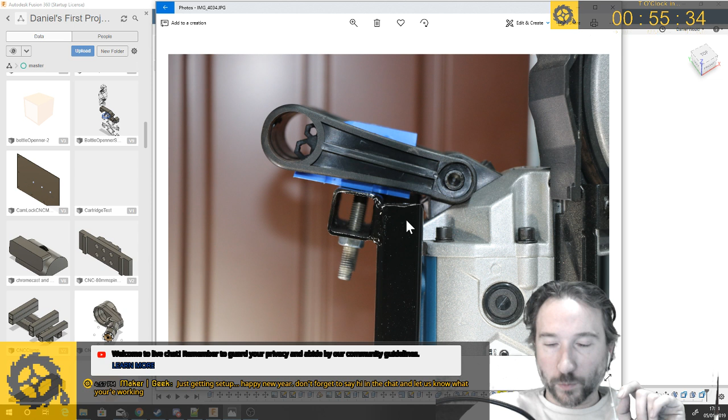This is sort of you can kind of see the handle just coming up there. Yeah, come back. There we are. So yeah, I kind of ended up with this being a little bit closer together and more directly under this, which I think worked nicely. Let's come back out of this.

So yeah, I took a bunch of beauty shots of this, but the main difference from what I had been thinking was I realized I don't really need or want a full-time welded-on foot for this stand, because the whole point is that it's easy to put the bandsaw on and also easy to take it off again. And if I take it off, I'm going to have to put this whole stand somewhere.

So I ended up realizing, well, I've got this vise. As long as I can clamp it securely in the vise, the flatter I can keep this whole mount, the better, because then I can just slot it somewhere out of the way. That was kind of the key revelation I had whilst I was cutting the steel originally this morning.

So that's what I ended up doing. This is it from the back when it's mounted. These two verticals ended up coming nice and tight into this side of the body. The switch is accessible here, and the handle just holds over on that puck, and it works. I'm not going to say perfectly, but it works well.

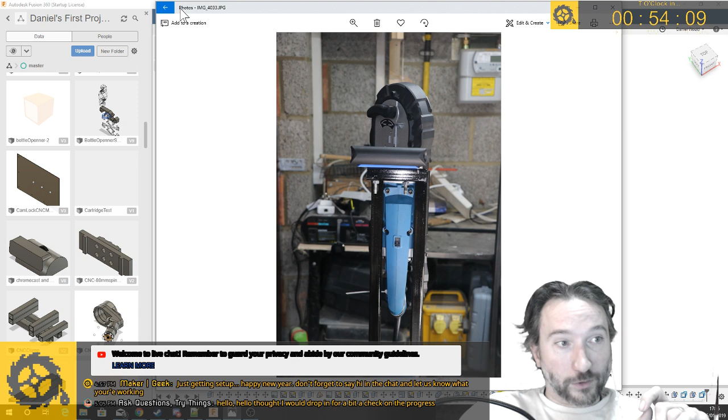Yeah, so I'd say progress today was good. I put the design of the 3D printed puck that I've worked on over the last couple of weeks into practice and put this whole mount in place. So this is kind of what it all looks like in situ.

There are a bunch of improvements I want to make to this, which I will certainly do separate videos on. There might be some cause to design something. I'm not super happy about zip tying the switch. It would be nicer if there was something built onto the stand that would reach across and clamp this in place, and I don't know whether I want to make that out of metal or 3D printing.

I might consider trying to make something that clamps onto the stand that reaches across. That would be quite cool. Ultimately I will probably make a larger work plate to clamp onto this metal piece right here. It slides back and forwards. There are a couple of screws that just go into a little track that you can clamp on, so I'd probably replace that.

And obviously the whole need to zip tie this means you end up with a plug-it-in-or-don't situation, and that's not ideal. So I will also probably, well, I have the beginnings of a plan to make it so that I have a sort of regular switch that it would plug into, which would let me switch it on and off nicely.

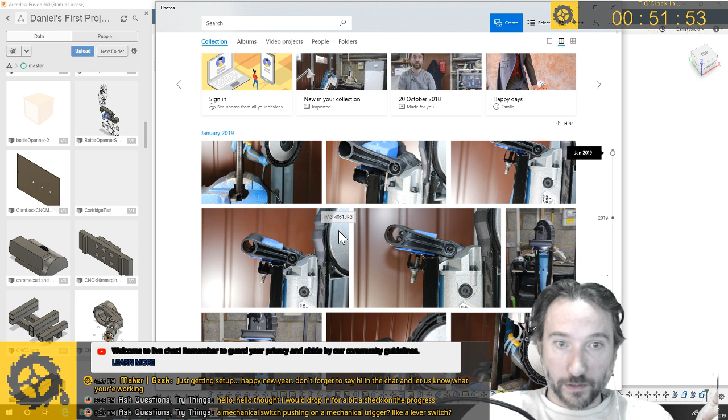It hasn't finished uploading some of that video. Maybe it has. There we are. So, although that's not working very well. We're going to get video. Let's just leave that for a second.

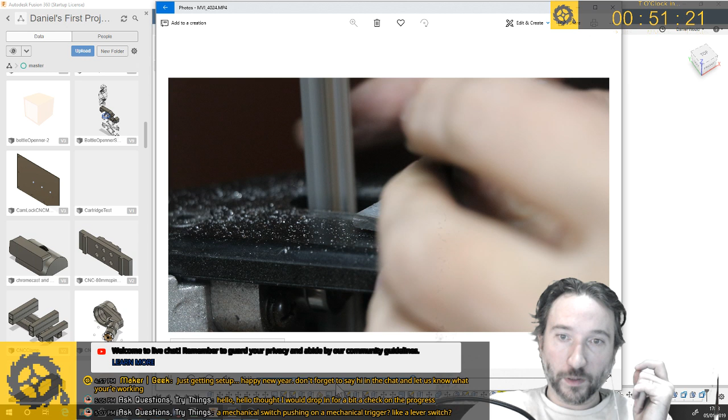But as you can see, it's really easy to use. I think the benefit of having a mount like this is quite cool — you can get a lot more control and precision. I didn't end up chopping anything completely through when I was doing it this way, just because I didn't want things to fall down through the fairly large gap here. I think a lot of people end up with a more zero-clearance pad when they're doing this kind of tight work, but there you go.

There will be a proper video of the making of that whole stand tied together, but for the people who joined to CAD like nobody's watching, you saw it first in terms of the initial thinking, design, etc. So I am going to put this to the side for now. I do have some ideas for switches and such, but I don't want to do that right this minute.

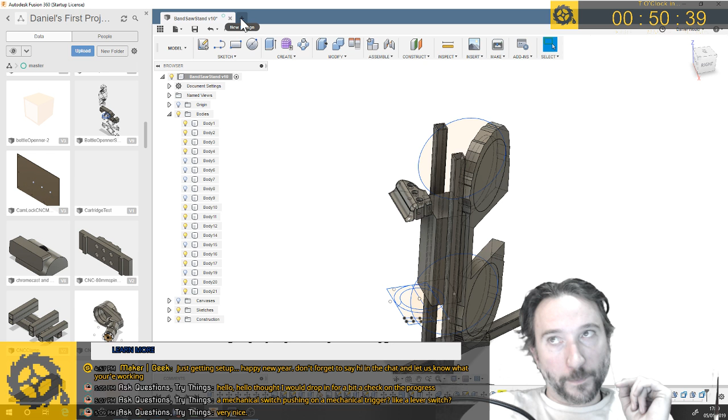I have a couple of things I want to work on. One is fairly boring, but in the scope of workshop tidying, I do have this idea. I've seen other people do 3D printed soft jaws for their vise, and working with the vise today made me think it would be kind of cool to do that. So I took some measurements earlier.

I might whip up a basic design for that quickly. I do want to finish this - the coffee carrier V2. I haven't finished the coffee carrier design. I did do a bit more work on it last week, and then I got frustrated with parts of it.

But we can continue that, and then the thing I want to get into at the end - it's been on the list for a long time - is to make a gate for the side of the house. Currently we have a little passage that runs down the side of the house that people can just come in and out of, no problem. It's been on the theory for a long time to just put maybe a little gate there, so I'd like to play with some design ideas for that.

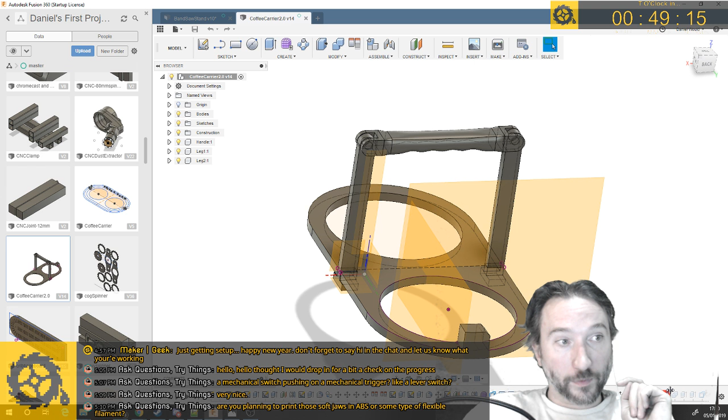So that is what's on my plan. Am I going to print the soft jaws in ABS or some sort of flexible filament? I might print them in PETG because I do have some PETG. That would probably be better than PLA, but I might try both. They're not very big, so the main thing I think will be to put some recesses in for magnets - that seems to be the cunning plan that people do.

So where to start? In fact, I'm going to do the soft jaws first, because I think it's going to be easy, and I realize saying that is like famous last words. I'm going to be here in like half an hour kicking myself for this stupid thing.

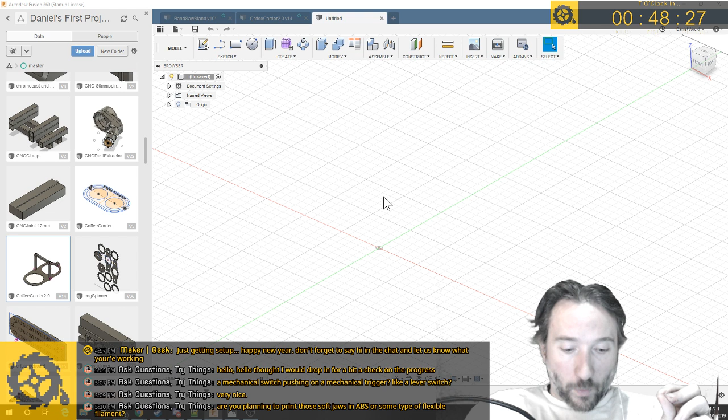Right, layout grid. So what do we need to do? So they're 107 mil wide. What I will quickly do is I'll just model up what is an actual jaw. So they are 25 mil tall and 13 wide, like this, and they are 107 mil long. Each jaw has a metal plate on it, which is screwed on.

So I just want to make a cover, basically something that will fit over that fairly snugly with space for some magnets to just hold them in place. There's no real forces at play - it's just going to be squished by the vice force. I guess I will want to think when I 3D print them about how much infill. Normally I print things very, very empty, but if the whole point is that it's going to be crushed in a vice, probably want to make them a little bit more robust.

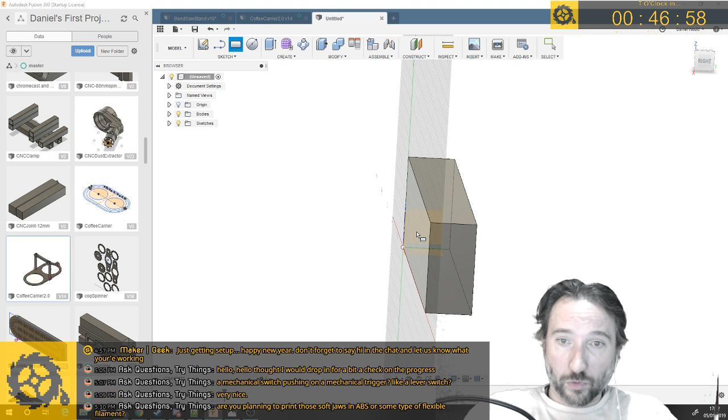So what is the best way to create essentially just something that will cap over this? Doesn't need to go full 13 wide. I'm going to draw on this plane, coming over a wee smidge in basically all directions. 27 by 100 - if I do 27, that's 2 mil higher than the thing, that sounds fine. 112 - what was 107, so how much do I want on each side? Probably only needs to be 111, because then we've got 2 mil clearance all the way around. I just need to dimension that off that line to make that what I want.

Marvelous. So what we'll do then is extrude that out, stick with our 2 mil dimension as a new body. Then let's turn that body off for a second, turn that sketch back on, and extrude the other way. In fact, I want to turn that body off, that body on, and we'll go back by 10 mil and join. And there we have a wee cover.

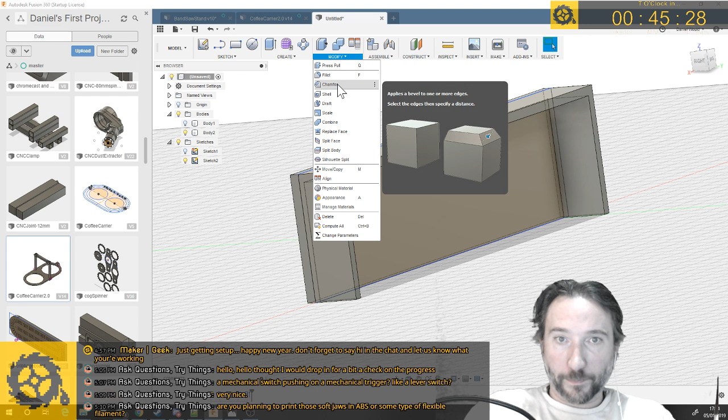That'll be perfect. Now, I don't think I need this to be squared all the way down. Let's just - not fillet, chamfer is what I want. So something like that. Maybe I'll do 2 distances and make that a little bit sharper - it doesn't need all that back material. It's obviously just going to be printed probably like that.

That'll do. I just want a couple of recesses for some magnets in the top. So let's draw in here, get to the center line. How big are my magnets? Oh yeah, I'll probably round the corners - that's a good idea because I just don't want to be touching things.

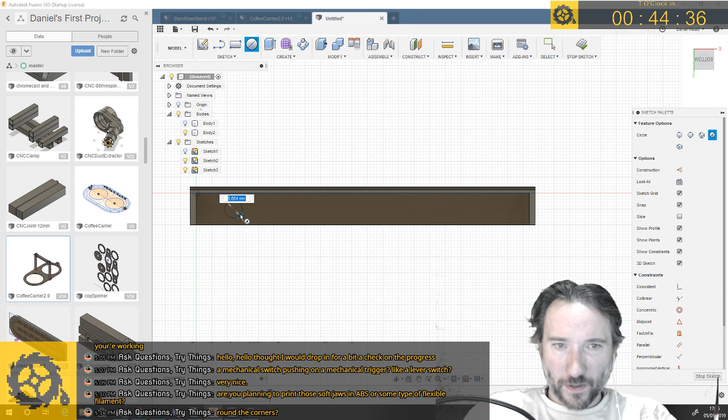How big were my magnets? I think I want to say 5, but let's assume 5 for now. Let's make them 15 in from the end - that's probably fine, isn't it? And let's create a rectangular pattern of them.

Somewhat evenly spread out, that looks good enough to me. Now I see the one thing I might find is that I'm planning on 2 mil thickness here, but that's not really going to be enough for the magnets, is it? That is not enough for the magnets. They're going to be at least...

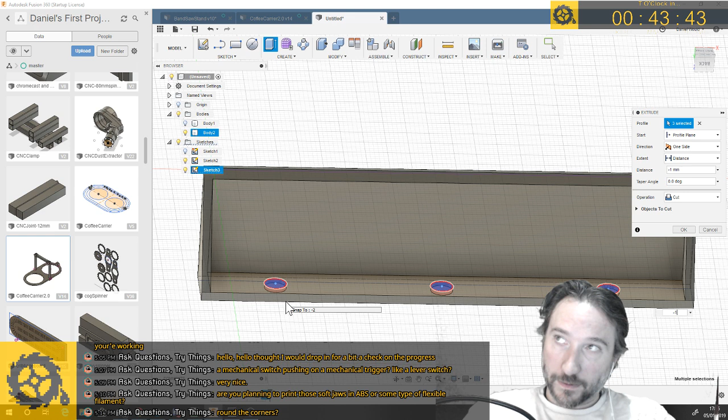I should have brought them up. I think I'm probably going to want to offset that face up, maybe another 2, top surface of a full 4 mil. That's a bit bulky, but that will give me a bit more space. I'm going to move that operation.

Come on, I want to move this operation. Oh, because I've got something active, that's why. We'll just reorder that and then edit that feature so that I can come down without causing myself problems. We'll come down more like 3 - it's at least 3. But there we are, that'll probably be that.

And then, as you say, let's round the corners. And I think - actually, before I round the corners, what we'll do is we'll put a little V slot in this front face in the center. I think that's probably going to be helpful.

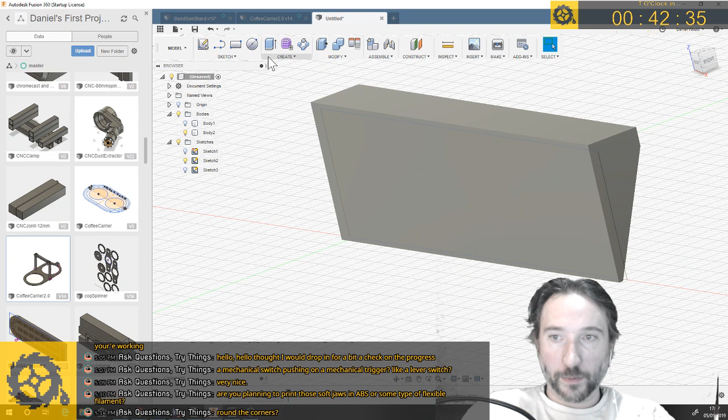Now I'm thinking about it, I might want to make this a bit more than 2 mil on this surface as well, because I want to dig in. So let's make it 4 mil on the front and the top, 2 mil on the sides, since they only need to latch over.

That gives us space to put a crimp in the middle. Let's see, where's my center point? There's my center point. We'll make a construction line, I think. And now what I want to do is, what's the easiest way to do this?

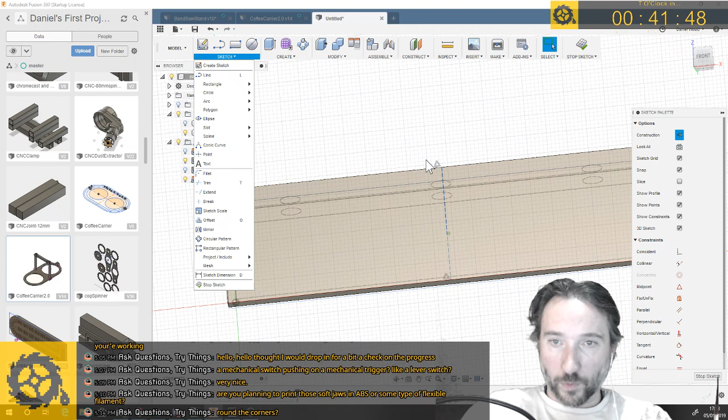How big of a V groove do I want? It only needs to be teeny tiny, a few mil. I don't know what the best way to do that's going to be. I could draw offset lines at either side. No, I think I probably want to do something on the end and then just extrude it across the length.

No, not in that sketch plane. Come on, stop messing around. This sketch plane right here.

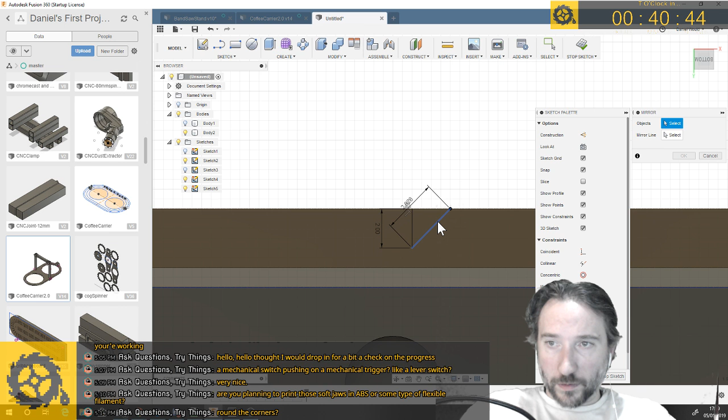Similarly, I have the center line come down about halfway. In fact, let's definitely come down halfway, and 45 degrees - just because it's better to do things that way. Also mirror pattern, please. Let's mirror over that center line, comme ça, and then we'll just extrude that groove all the way through.

Come on, there we are. Right, I think that'll do, right? That looks like a... what do we want? Various soft jaws. A couple of those printed in something like PETG, that'll probably do it.

So I won't print them right now because I do want to double check my magnets, but that's basically just going to be dob of glue in the bottom, stick the magnets in, bish bash bosh.

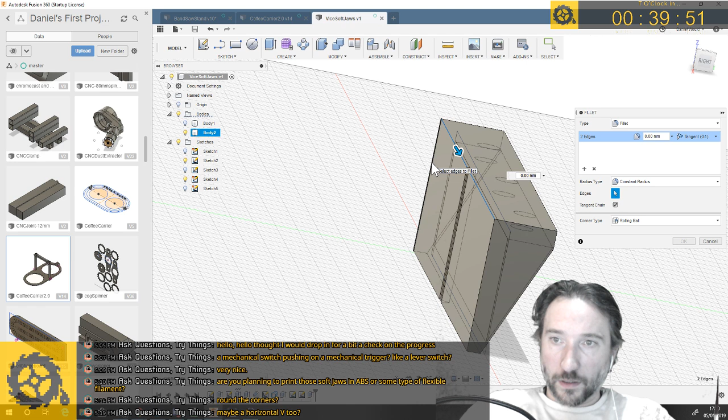So yes, chamfer the sides - I'll fillet the sides even. Let's take what, a 1 mil? Ooh, it's 1 mil too much. It's probably fine.

Definitely want that on all of those faces which are going to touch anything. And I guess we might as well do it on these faces which are on top. Yeah, that's probably fine. Maybe a horizontal V as well - that's a good idea, that is a good idea.

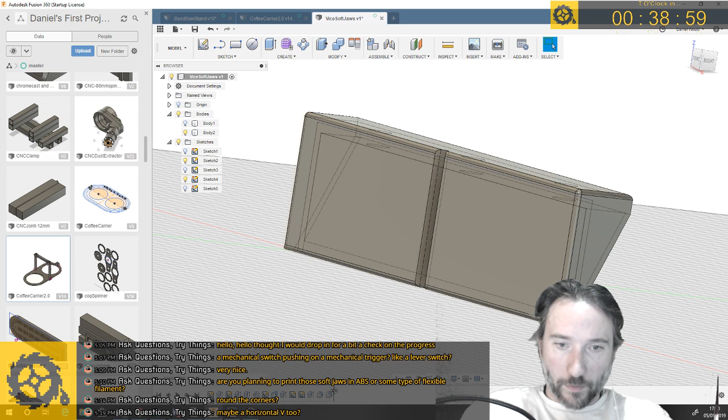Let me do that before I radius anything, because that just makes life easier. Let's come along here, middle line. We'll do the same thing, come back by 2. Then we'll draw another line.

Come up 45 degrees. Except you're off at a weird angle - what's the right angle, what do I want here? It shouldn't be so difficult. Hang on a second, if that's 45 and that's 90, I want 135. That's what I want, I don't know why that took me so long.

Come on, don't mess with me around. I don't know, it's snapped to 140 like nobody's business. There we are. And we'll mirror over that, like that. And we'll do the same thing that way.

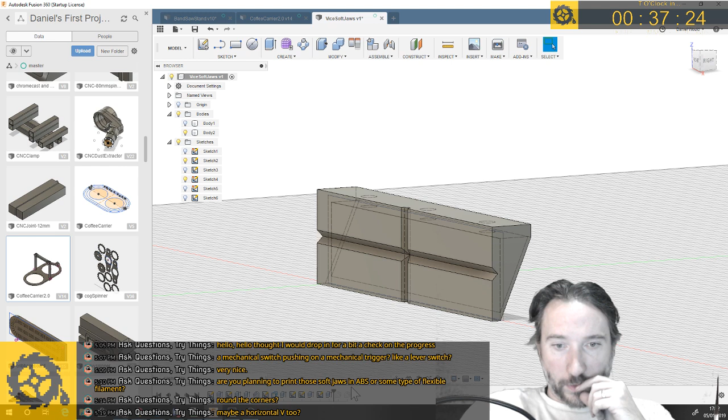Yes, that all seems very sensible. It's coped with. Now, should I chamfer or put gentle fillets on those internal lines now, or is that going to be all right? That's probably all right, I probably want those somewhat crisp. Again, I still think I'm probably going to print in this orientation, so those 45-degree angles should be fine with no supports.

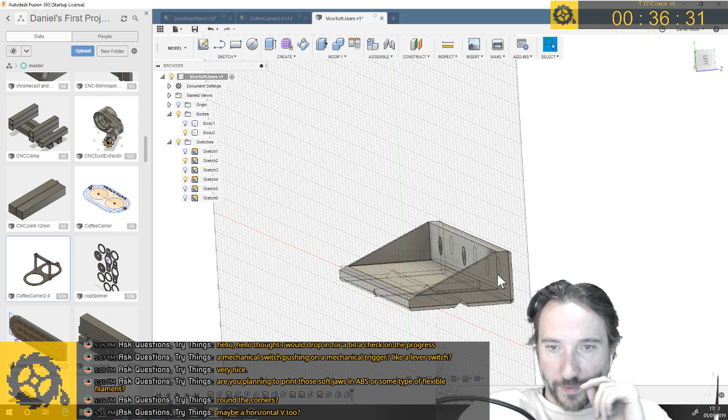What does that mean about strength, though? So these lines will be there, so there will be kind of a slight shear line here, but I think with these end caps, that should probably be fine. Right, let us quickly export that as an STL and just double check it in a slicer before we move on to something else.

Come on, thinking. Yeah.

Nice soft jaws. Somewhere I have the soft jaw pattern for the CNC vice, which is just MDF. Well, I made them out of MDF, but that's kind of wood soft jaws with a pattern that's just designed so I know where all the screws go through.

Right, slicer. So that's good. Whilst the slicer is loading, how are we doing for time? 25 minutes in, 35 minutes in.

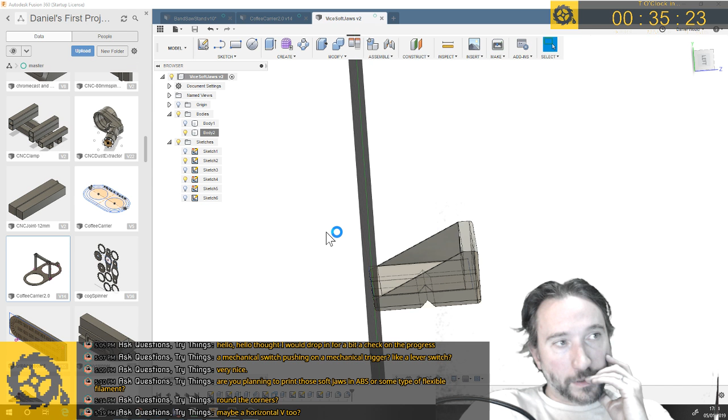For anyone that has been paying attention, you may notice the countdown timer is not to G&T o'clock as it usually is. It is just to T o'clock because it is January and I'm partaking, for the moment at least, in dry January. Just one of those silly ideas that seemed like a good idea at the beginning of the year, to try and give the body a rest after a fairly heavy December.

What did I just call that? I call it vice soft jaws.

Boom, here we go. And of course, it doesn't put it in the right orientation. We'll have you on the deck. Thank you very much.

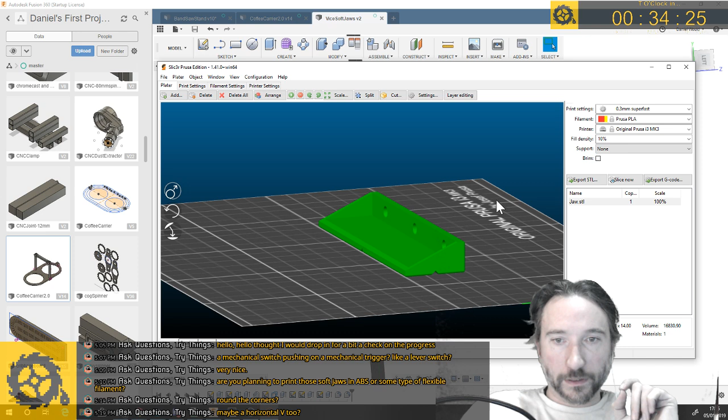So I've been printing everything at the moment at this 0.3mm super fast setting, which I copied from MakerMuse, and it's awesome because it's a lot faster. I say a lot faster, like it's essentially 50% faster than the fastest setting that comes pre-canned. And so far, for workshop stuff, the quality is fantastic, it's perfectly good. So that is, however, a 10% infill.

So one thing I don't know about that is, is that going to be strong enough? I guess because of those V cuts, you kind of do have a bunch of internal structure. Yeah, that's probably fine. And if it's not fine, I can always print them again. It doesn't seem like it would take much.

Let me just export that to see how, not sure, hang on, see how much that is.

Maker's Muse's video today on stringing. What can cause stringing was interesting. Oh, I haven't seen that. I shall have to check that out.

I don't normally have a problem with stringing with PLA, but with the PET-G, it definitely is way more stringy.

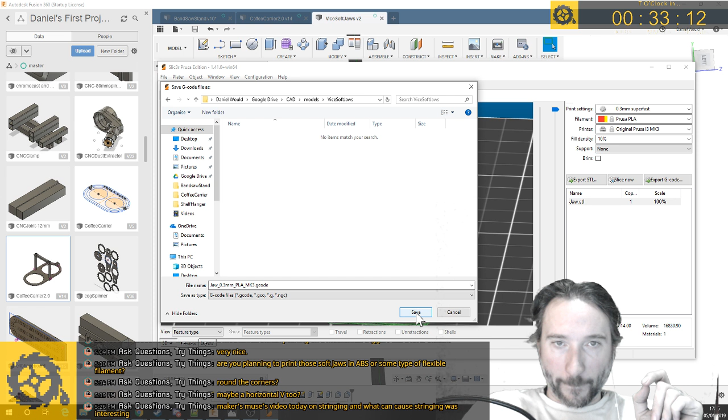Save that. I still wish that this thing would tell me the estimated print time without me having to save the G code. But there you go. So 40 minutes for one.

Actually, that's a good point. Why would I even set it up for one? I'm always going to want these in pairs. Let's increase copies and do that. I might actually...

So the annoying thing about increased copies is that they are clones and you can't position them separately. But what I would do here, I think, is put the large side back to back to minimize the movement it's going to need to make when printing both.

So I'm actually, let's decrease copies. Oh, that's interesting, you kept that one. Okay, and instead of doing it that way, I'm going to add it as another separate component. And this way I can position it on its own. Marvelous.

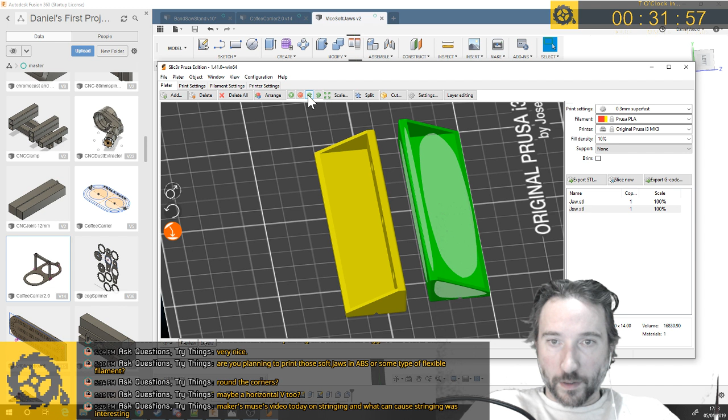Because I think, and I don't know that it would make much difference, but I think that would print faster in the real world because as this goes up, it has increasingly less travel to do. That probably makes no real world difference, but in my mind it's details like that that are important.

So let's just double check what that is going to take us. So it was like 38 minutes for one, pretty much exactly twice. Okay. But again, I want to double check the magnets that I have in the garage before I commit to that. So that is that done. We're halfway through.

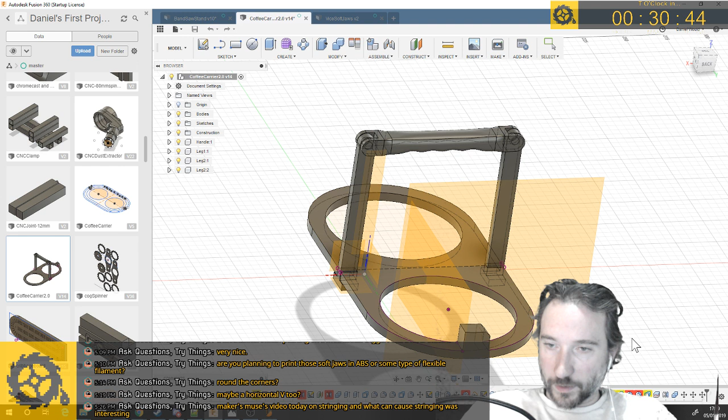Let's look at where we got to with the coffee carrier, because I should probably try and finish this version and see if we get anywhere better.

Oh my goodness, this is part of what was causing me craziness, because at some point I had made joints and then I changed the size of everything, so you'll see from the red littered across the timeline at the bottom, I've made a bit of a rod for my own back with this one. I don't know why. What is this?

Get rid of that one. Don't care about that one.

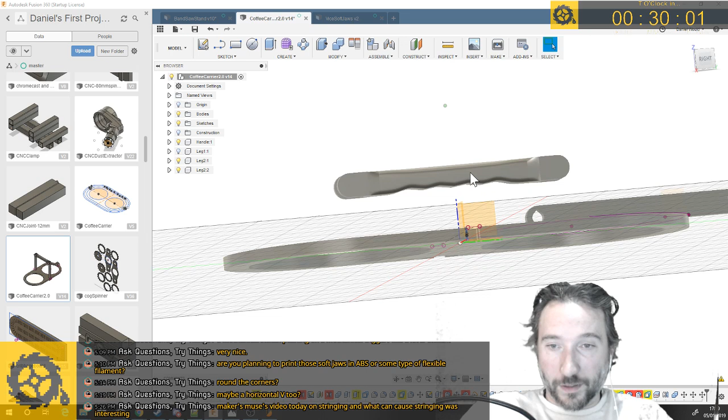So I think in last week's, I was similar to what we just did with the V groove in the soft jaws. I was having V grooves in the bottom here as my mechanism for making sure that the legs of this handle would not fly off.

And then I realized that's probably still not good enough. Actually, I'll just make it a full slot all the way through. So we've ended up with these crosses that cut through, and then on the bottom of the legs, these nodules.

Although, why have I not got those on both sides? I suspect that's one of the many things that these mirrors are complaining about. Obviously that notch should be on both sides of each leg, which I think will be fine.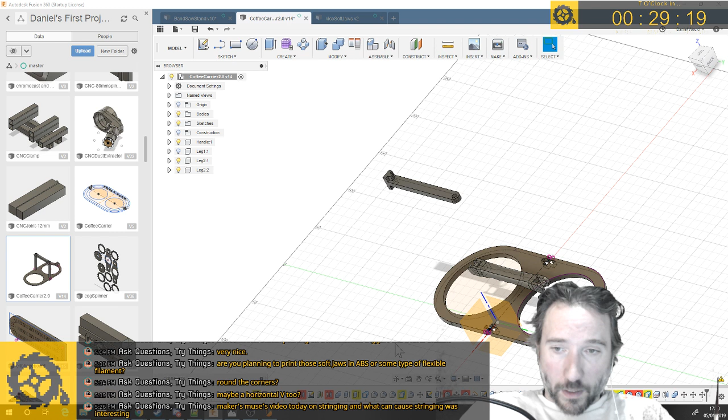The thing that I was messing with was in the original design, and I may have it around here somewhere. Do I have it around here somewhere? Yes. In the original design, the handle was going to clip on into these, I guess, little clippy bits on the top. I don't know what to call them.

And I was thinking about just giving them a bit more space, because on the side what you can see is that in very short order one of those broke off.

But again, thinking in terms of strength of print orientation, I found myself wondering, can I make the handle come in almost sideways, and whether that would be better, because then I could have a larger block, kind of V, with a bit more support to it, but with a slot.

And I set off to do that, but sometimes editing on top of a timeline is a bit problematic. Let's have a look. Right, yeah, so here I was attempting to mirror the faces of this block across.

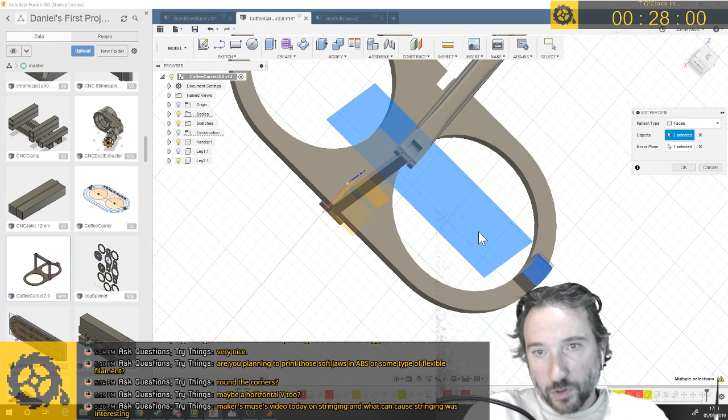Right, so this mirror is complete garbage. Get rid of that mirror, I don't need that. Yes, that was a mirror from when I did have two legs on either side.

Now let's look at this mirror. This is the mirror that I want to actually do. I want to mirror these faces. So you can see I have a slightly chunky block.

Now I noticed this last time, and I'm convinced this is a bug with Fusion, which is if I'm trying to edit an existing mirror command, it doesn't let me select more than one face.

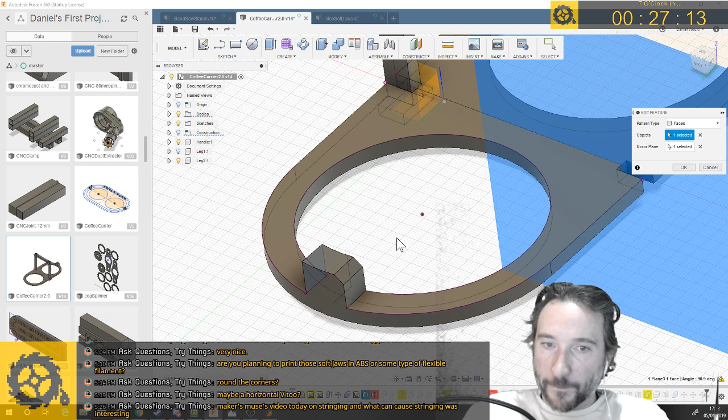Like I can say, reset that. Maybe if I deselect the mirror plane as well - that's it, it doesn't let you select another face once you've selected the mirror plane. You have to do it like two steps. So I'm going to try selecting that and that.

I think this could cause me some problems. Let me turn construction back on. Let's have that, and go and do it. And that didn't work. Let's just bring ourselves way back to that point in the timeline.

This is why I didn't start with this, because if I'd started with this, I'd have gotten pissed off, and that would have been non-constructive for the beginning. Whereas at least now I feel like I've made some progress today.

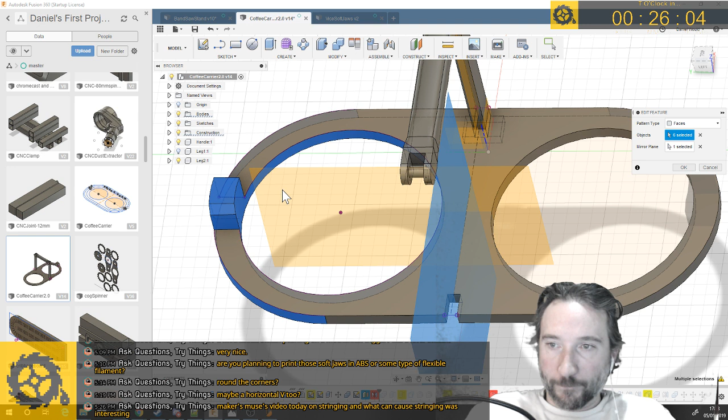That ought to work, right? There ought not be anything massively complicated about doing that. But, okay, you don't want to work that way. Understood, Fusion. Two can play at that game.

So what we're going to do is we're going to split this whole body. Split the whole body. And we're just going to mirror the whole damn thing.

So let's - where are you? Why are you not? Did that split not work? Which - oh, there we are. It's fine, good. So forget that side of it completely.

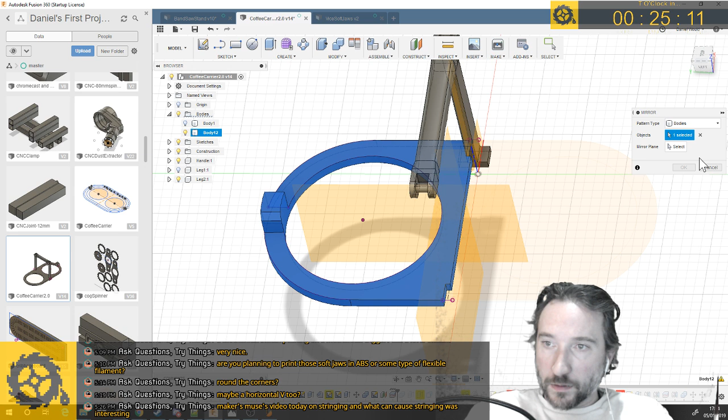And now we'll mirror the body again - body, not faces. Perfect. And we'll combine those two.

I can now complete work on this block to do what I need it to do, and then hopefully that duplication and whatnot mirroring will work. So, I need a leg.

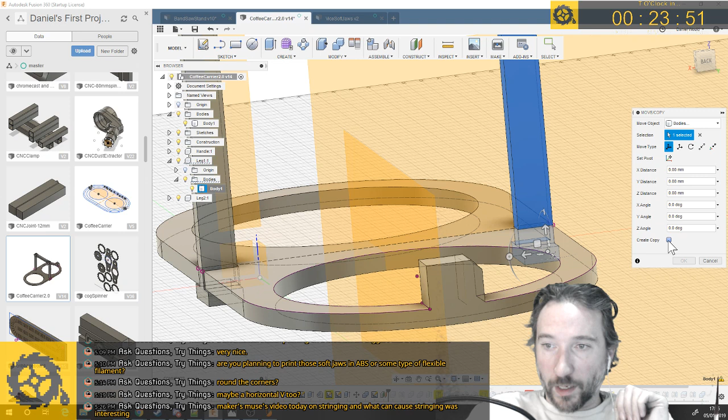This was the other thing annoying me the other day, which I need to work around now. Because the leg is a component, you get into this weird problem with moving it and it capturing position, and I don't really understand capture positions, so I'm just going to create a new one and hopefully it won't suddenly disappear on me. Because what I had last time was I'd carefully position this whole thing, get it where I wanted to cut it out of this block, and then go on to the next operation and it would jump right back to where it was, with no operation in the timeline to explain it. It was immensely frustrating.

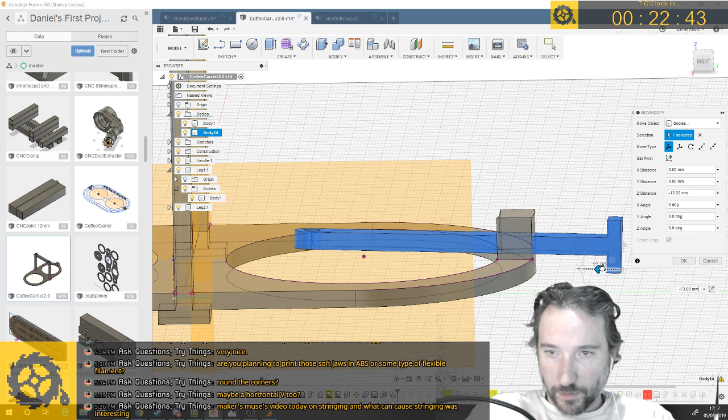Right, so I think the idea was that this would be at a little bit of an angle, maybe not that much. Let's do 3 degrees. So a little bit of an angle into the middle, and through there, a little bit of an angle twisted down like that. May even not need that block to be as big as it is.

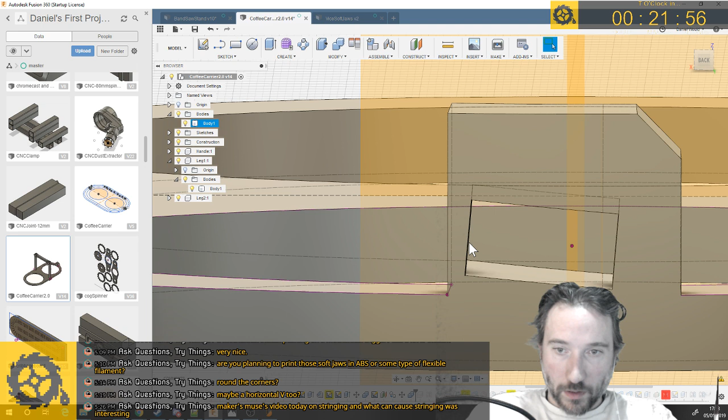And then we'll cut that piece out of there. Cut. And I think I can dispense with that leg, I just created the copy to do that. So that leaves me just needing to open that hole up a little bit more, maybe provide a little bit more tolerance for any kind of print, and then back up this side a bit. Although if I back up that side, let's worry about that in a second.

So I want to remove this whole slice in a nice way. I think the nicest way to do that is essentially... what the hell am I selected on? Definitely not what I expected to be selected on. Let's try that again. Can I have this? Oh.

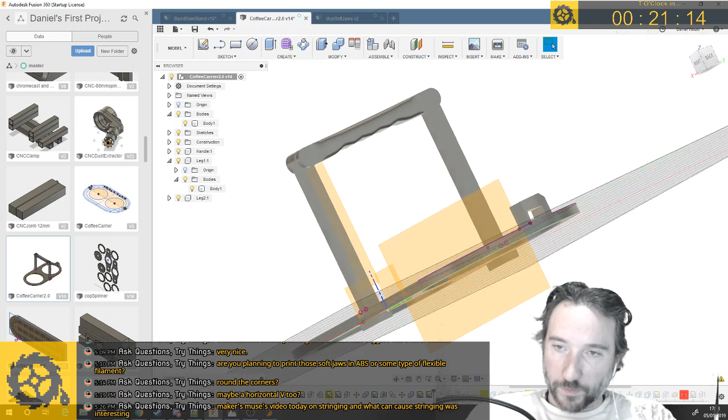These things are sent to try us. You can only sketch on flat surfaces, and obviously my end surfaces are not flat because I set this up to follow the curve. So as much as it looks kind of flat, it is in fact not flat. That's fine, that's fine.

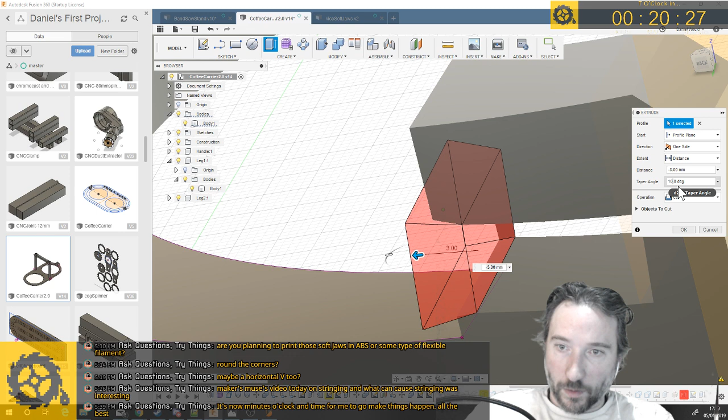Best way to cut the remainder of that out. In theory you can offset faces or press pull. I wonder if I can do an extrude on that. That's the way to do it. Except, what I should try is a taper angle of 10. I want it to flare out, and I need it to flare out enough to take out this tiny remnant here on the curve, because otherwise I'm going to end up with that weird bit to deal with.

And that's nice because I end up with a nice chamfered opening.

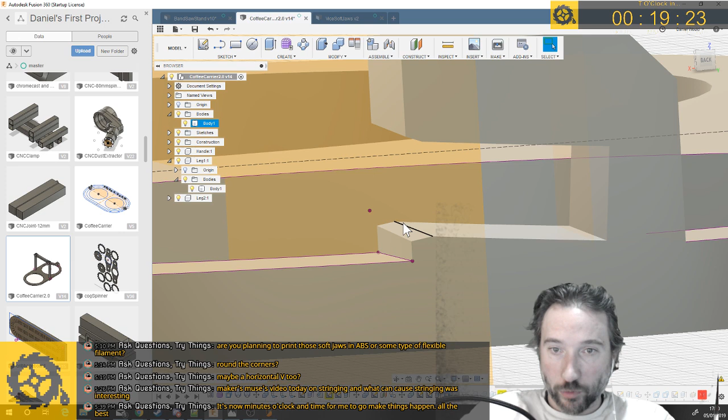In the meantime, I've got 20 more minutes before I break for tea o'clock. Let's back that off by 0.2, minus 0.2 mil, just to give us a wee bit more space there, and then I probably do want to create a little ridge, an extra ridge along this line maybe, to hold things in.

Now I realized as I was talking earlier about wanting to put more material here, and I was just going to curve that, but I think if I curve that, I'm going to have a problem when I try to fillet, when I want to select faces. So I think the better way to do that is probably to do that. There we go.

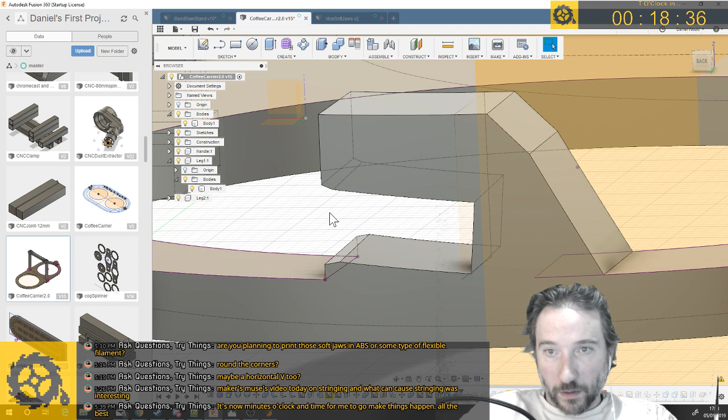And I don't even think I need that much height here. I'm going to, okay, or not, let's not do it that way. Yeah sorry, forget I suggested that, Fusion. You were not happy about that at all, were you? I just don't need that much bulk there.

Let's try that with, I think if I do an extrude, I'm going to end up with a weird thing. Always a bit of a weird problem, isn't there, Fusion? You can never make life easy. Right, what am I thinking? Let's...

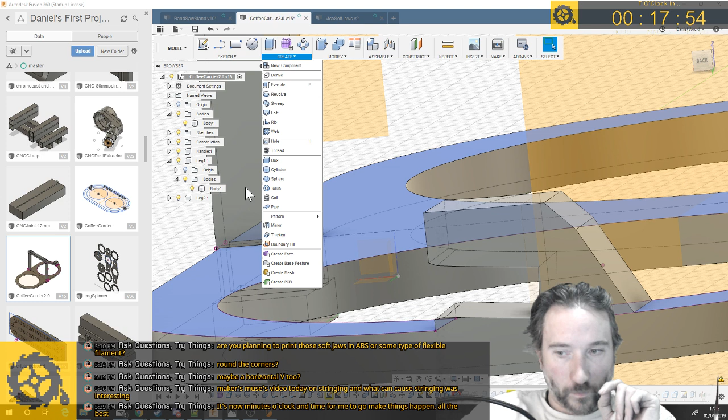Measure this. Let's worry about the retaining clips for the legs first, and then I'll come back to worrying about the fact that this is too big. So that is 10 mil from there to there, which I knew because that's obviously how I created it.

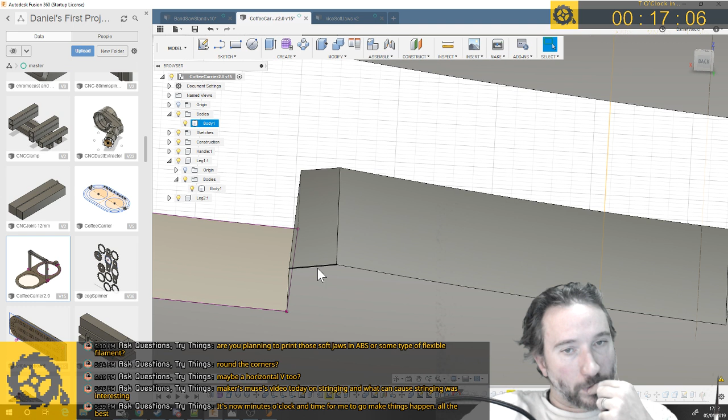So what I should be able to do is create a circle on this. Again, I really want to be able to sketch on this end plane, it would be so much more convenient. What's a good way to do this?

I'll call cylinder that is like 10 mil wide. Does it need to be 10 mil? Maybe I'll make it 8 mil wide. And then I'll move that to where I need it.

Yeah, you're in a weird orientation. That's not helpful. I say weird orientation, I don't know. How did it decide? Why did it decide that it needed to? Oh, I probably didn't need it to be 2 mil, did I?

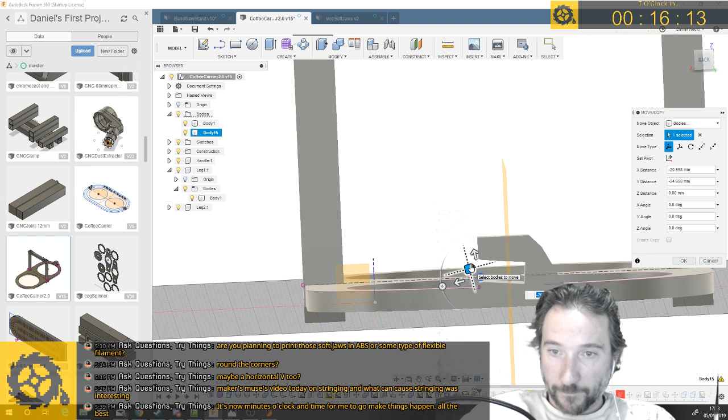Well, let's see. So if I bury that. Oh, if I, yeah, I'm on some kind of wacky axis that Fusion has chosen at random just to mess with me. Let's bring that in this way. Yeah, that is fine. Just move it to there for the moment, and then I'll worry about aligning things.

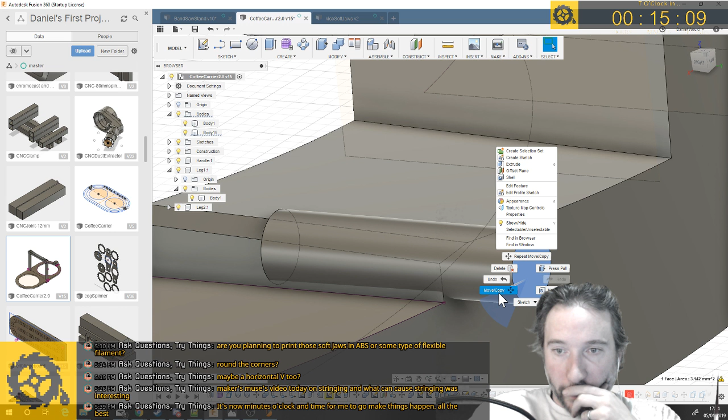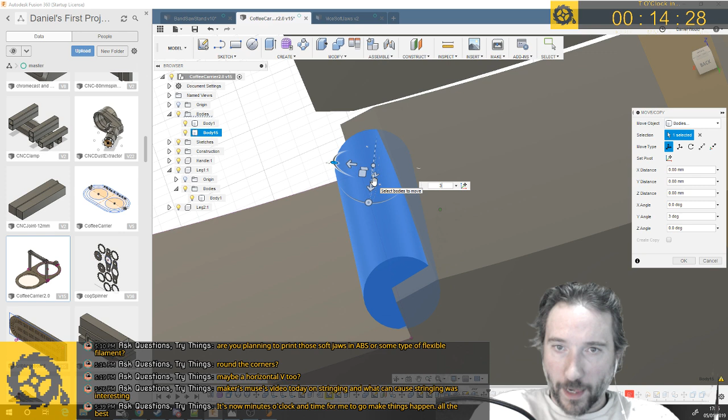Of course I'm twisted because this is on an angle as well. I don't need to go out that far. 2 degrees, 3 degrees, 3 degrees will be fine. And that's way too much that way. Minus 2 degrees. That looks a bit straighter, doesn't it? That looks a lot straighter.

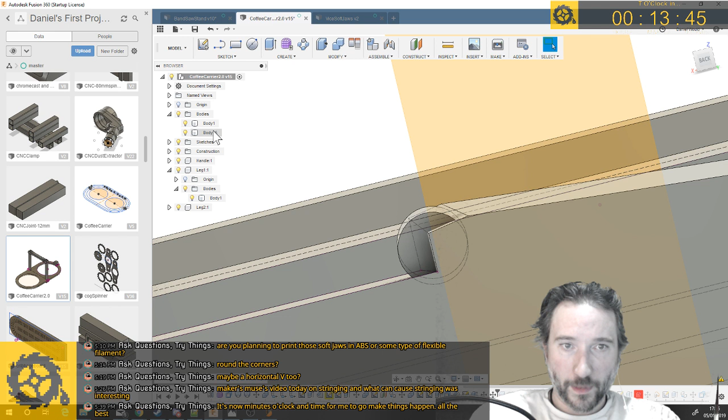So if I do that, is that enough to just add a bit of a ridge? Bit of a ridge, not too much of a ridge, bit of a ridge. That's a little shallow, isn't it? Feel like maybe it needs to be a teeny tiny bit taller. And where taller in this case is not obvious.

Let's say 0.3. Oh, way too much. Although it does help to remember what ridiculous scale I'm working at here. Maybe like that, maybe like that. That's probably fine. I don't really need there to be such weird geometry underneath this thing though.

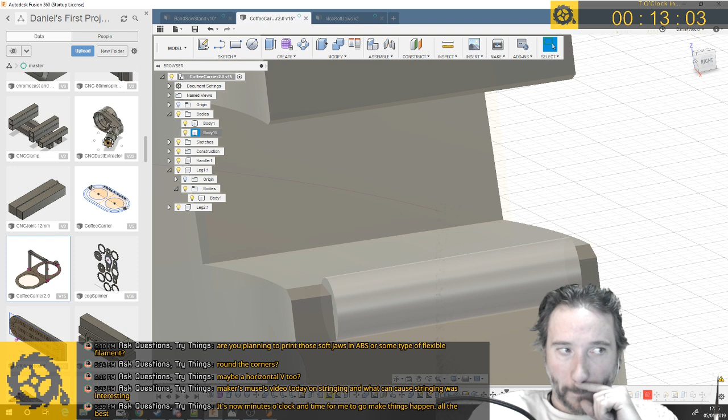Feeling like this is not the best way to do this. Definite regret. Because now I've got this weird undercut geometry and I must be able to do this a nicer way. It's because I'm on a circle, on a curved reference plane, trying to do something that should be simple.

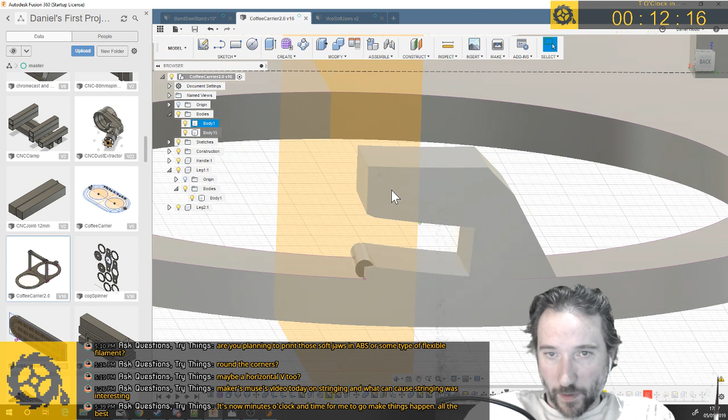Just leave it like that for the moment. So that still leaves us with way too much material up here. Happier about material back here. So if I can slant this off and remove that bulk, then we might be in somewhere in the territory of a thing that I want to sort of accept as finished.

And again, maybe the easiest thing to do here is just create a— what if I sketch on this surface and just literally create something that covers the whole lot, and then we'll just extrude that whole thing down and use it as a cutting tool. That'll do. That looks much more like it.

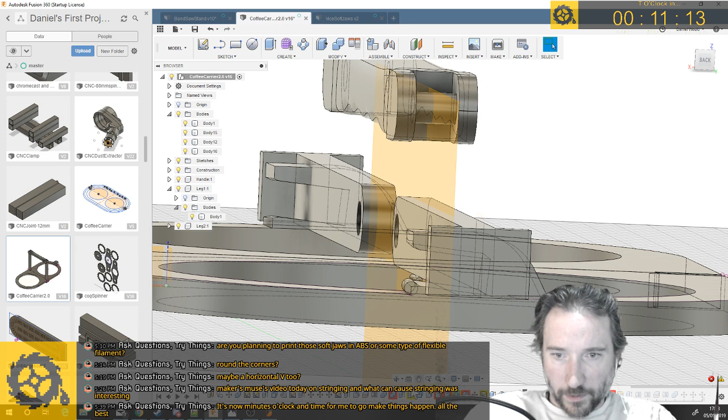Let's chamfer this bad boy off like that. And then let's step to the end. Let's have a look. Oh, I guess this is close to a point where I was dealing with something. Right, come on, all the way to the end please.

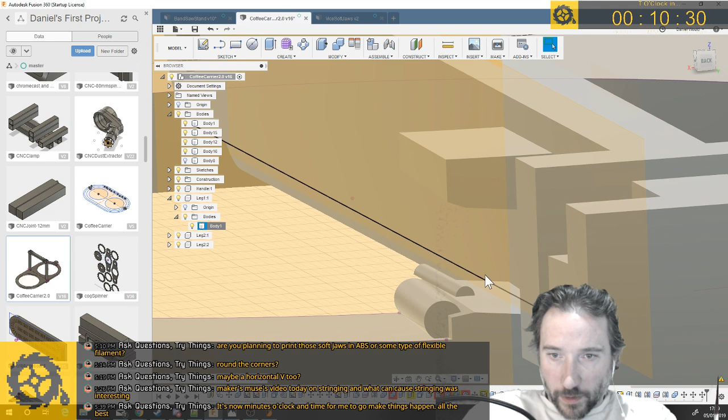Where did you get created? Is that where you got created? Yep, yep. Oh, that's interesting. So if I select a surface, I had not noticed that before—the little three lines indicate the operation that did something with it. I'm going to delete that operation. Go away, I do not want you anymore.

Yes, you're a separate body at the moment. You need to become part of the main body. That's for show.

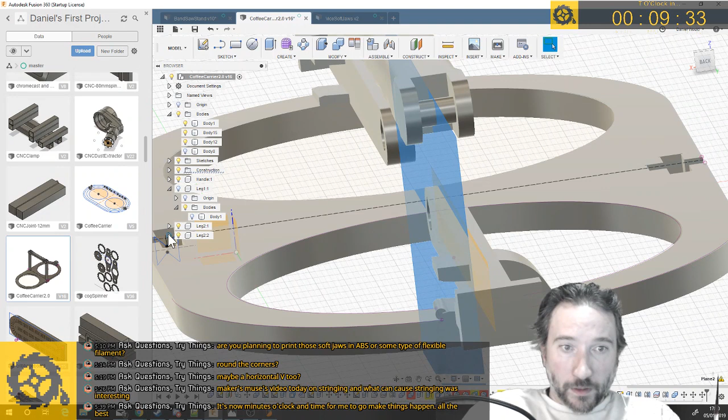What have we got here? What are you? Oh, you're leg 1. Leg 1 is rubbish, I don't need it. Leg 2 and leg 3, or leg 2 and leg 2's copy, are where it's at. So we still need to fix— oh no, we don't need to fix now. I obviously fixed that by fixing some other random thing that wasn't working. That's reassuring, he says, obviously reassuring when things fix themselves.

So I think that— oh yeah. So that's really not helpful, is it? That's because these legs exist off the same design, but they're mirrored around a thing that I don't understand.

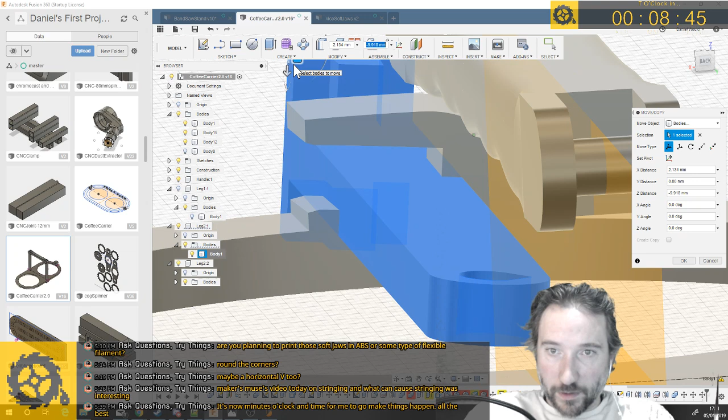Right, let's just get this one side positioned sensibly, and we'll worry about the other side later. Oh, I still need to— yeah, because I haven't gotten that random little ridge thing sorted, then it's also not on this side yet. 2 degrees, no, minus 3 degrees. I think it was minus 3 degrees. Maybe it wasn't.

So that's sort of where we're at, right? So when it's in place, it'll latch in like that. We're almost golden. I could have probably just aligned that. Right.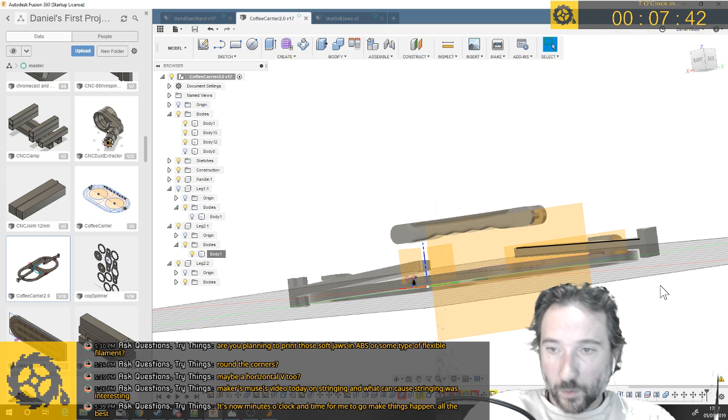Save. This one is going to be all over the shop. Oh no, it is sort of mirrored. It is in its place. I think we're good, almost exactly where we want to be. Oh, except no, you're twisted the wrong way because you're mirrored in both axes. Never mind, forget I said anything. Let's come back down here somewhere.

Before I do that mirror operation, we'll combine those two bodies in a join. Beautiful joinness. There we are. And back to the present.

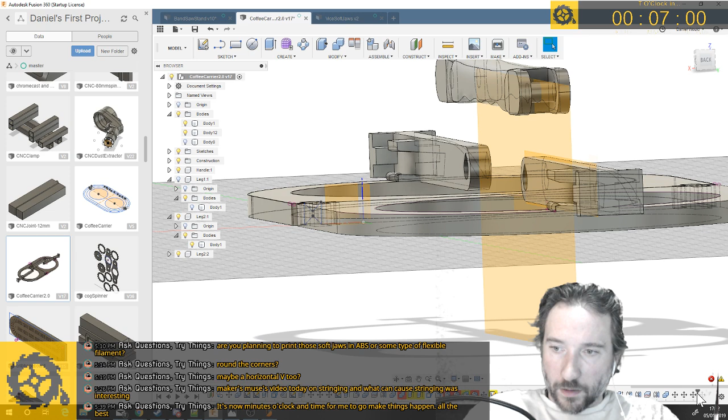So if we pretend for a second that we don't care about that, this is the main finished design for the main carrier. Handle design is still good. I just need to position all of those things together properly for the print, and we can have another go at that design.

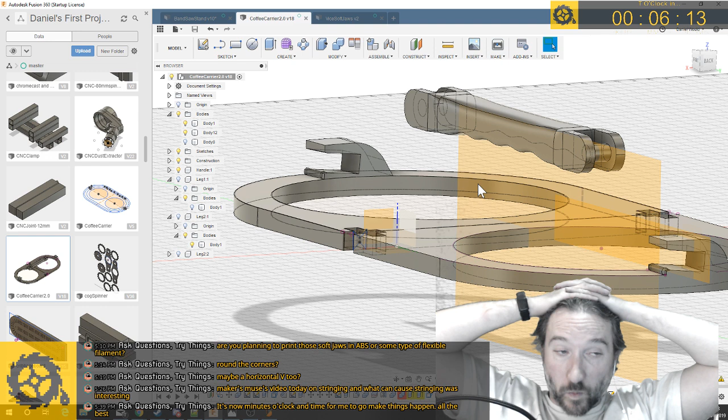The only thing - have I checked that with the longer legs I can fit them on the print bed? Probably not. Maybe not. We'll do that another time.

What was the other thing? Oh, I wanted to start work on a gate, didn't I? Right, running out of time, but the very least I can do is put in some basic dimensions for where the side gate needs to go.

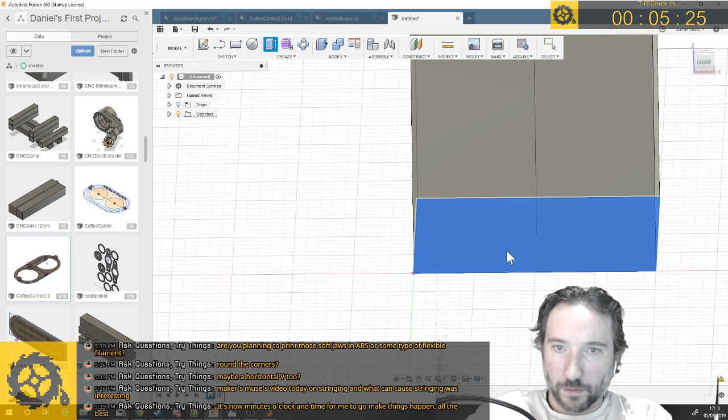So what are we going to do? We're going to represent the corner of the house. Let's make you like 1 meter by 1 meter for a second, and we'll go up by, let's say, 2 meters. Right, pretend that's the corner of the house.

In fact, I wonder if I can give it a brick - can I give it physical material? Stone, cobblestone, stone - brick would be good, right? So yes, I just want something that differentiates a bit. I mean, it doesn't really need to be limestone. Let's just pretend my house is limestone. It isn't, but hey.

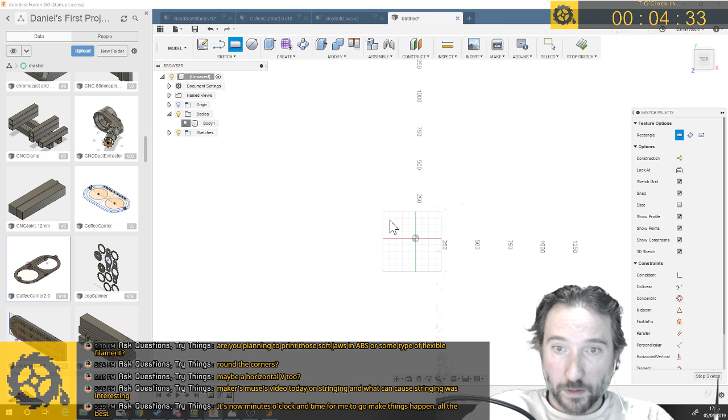And then also on that plane, let's create a thing which is - I mean essentially it's a fence panel. It doesn't really matter. Let's say that it is, well since we're working with meters, let's do that, but then we'll move it - we'll dimension it off of this line here, because what we have is 970 mil to work with.

And let's pop you up by like 50, because what I actually have, I measured to the internal rails on the back of the fence panels, and I might as well do, you know, a proper model of the actual thing.

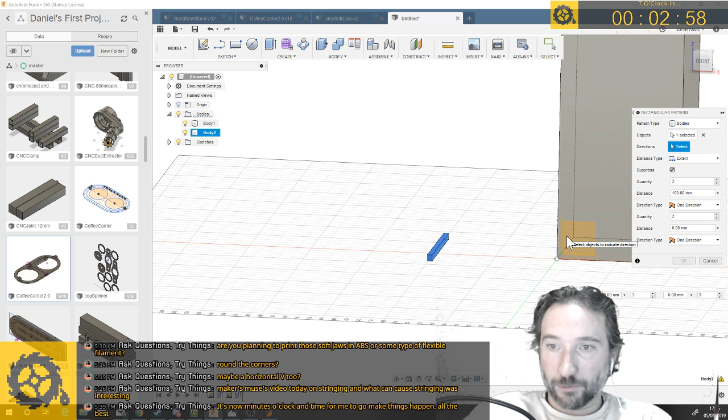Pattern, let's have that. Why do I not have an arrow? Where's my arrow from a pattern? Oh for goodness sake. Why can't - what? Am I missing something? Oh, I need to select a direction. That's probably why I don't have an arrow yet. Of course.

So, that's more like that, maybe. That'll do, I can figure out the actual heights, but basically this is the hole that I have to work in. And I was thinking I would make basically a metal gate using 25 mil square stock and some flat stock that I have, or can buy more of.

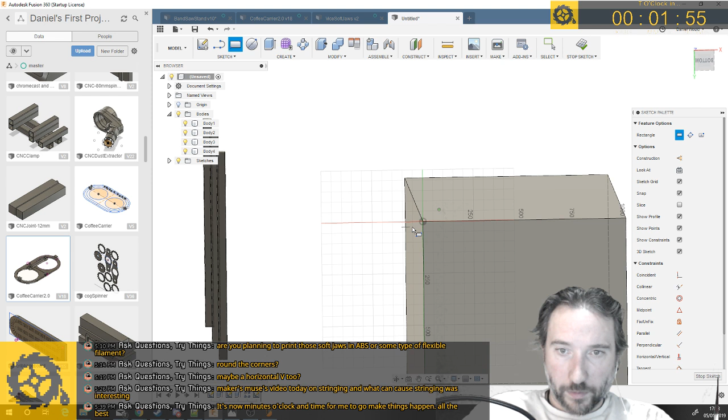So I kind of want to sketch in here, is that right? One last thing I will do quickly is, I want to sketch on this plane or face, thank you. Doesn't really matter where, broadly against here is fine. So 25 by 25 - let's just quickly model up a bit of steel.

Offset that thing - it's pretty sure it's 2 mil, and let's fillet our corners by also 2 mil. And we are nearly out of time, so this is going to have to wait for maybe tomorrow, maybe next week.

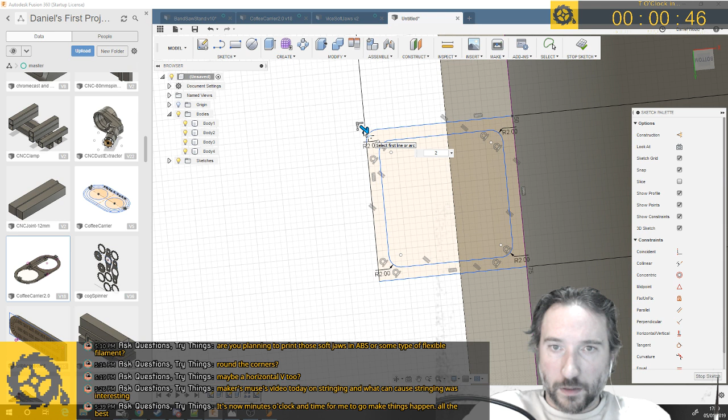But I'm gonna play with sketching a design for the old gate. This is probably a much faster way of doing this than I'm doing this. Can I select multiple of these at once? I obviously can, and I should have done so from the get-go. No, not 8.

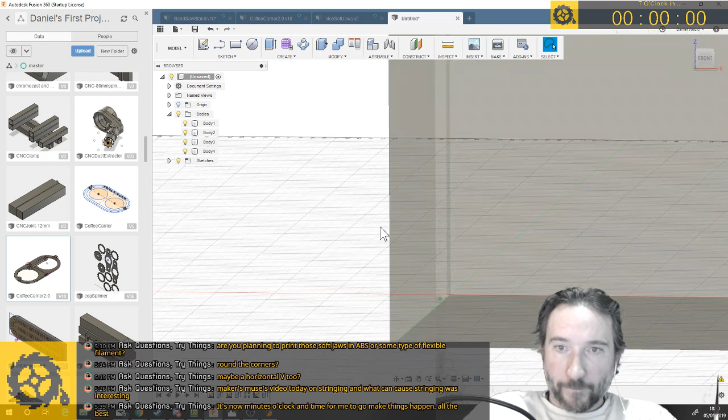Oh. Let's try that again, and then we'll give it up for today. Two, boom, done. So the important thing is that I do know that I currently have a piece of steel which is about 166 point - let's say 7. So I have a chunk of something.

Oh, did I just join that? I didn't mean to join that. Right, the beeper went off. The beeper beeped, we are out of time. Doesn't look like much, but that is going to be a side gate. Right.